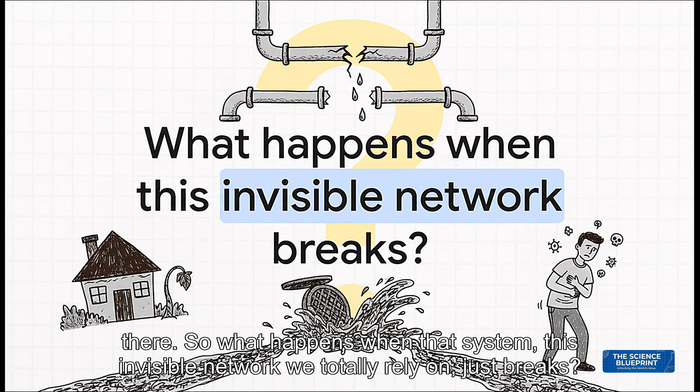So, what happens when that system, this invisible network we totally rely on, just breaks? Well, as we're about to see, the consequences are anything but invisible. In fact, they can be absolutely catastrophic for our health and for the world around us. Yeah, because when these wastewater systems fail, it's not just some simple maintenance issue or a minor headache. We're talking about a genuine and growing crisis that's unfolding silently right beneath our streets.

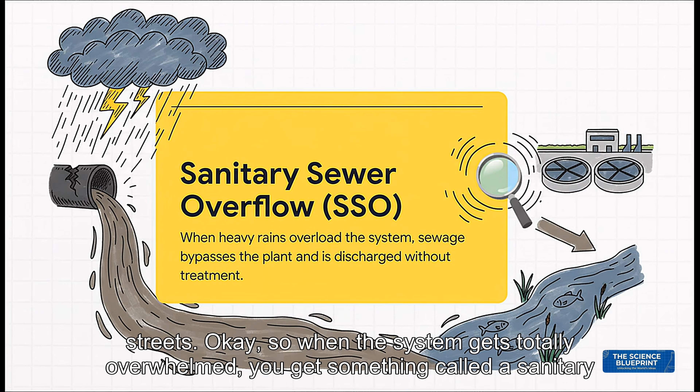Okay, so when the system gets totally overwhelmed, you get something called a sanitary sewer overflow, or an SSO for short. And this is the critical failure point. It means the wastewater isn't going to the treatment plant like it's supposed to. Nope. It's bypassing the whole system and spilling raw, untreated sewage directly into our rivers, our lakes, and even our streets. And the cost of an SSO is just staggering.

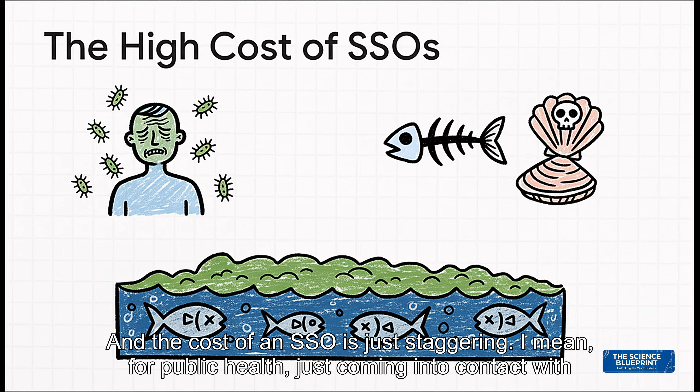I mean, for public health, just coming into contact with this water can cause really nasty infections. It gets into the food chain, which means fish and shellfish from those polluted waters can make people seriously ill. And for the environment, this sudden flood of, well, nutrients, it triggers these massive algal blooms that literally suck all the oxygen out of the water, creating what are called dead zones, where basically nothing can survive.

So, to really get how things can go so wrong, we first have to appreciate the incredible engineering that's designed to make things go right. This isn't just some random collection of pipes. It's a meticulously planned, man-made river system flowing right under our cities. On the most basic level, cities usually have one of two kinds of systems.

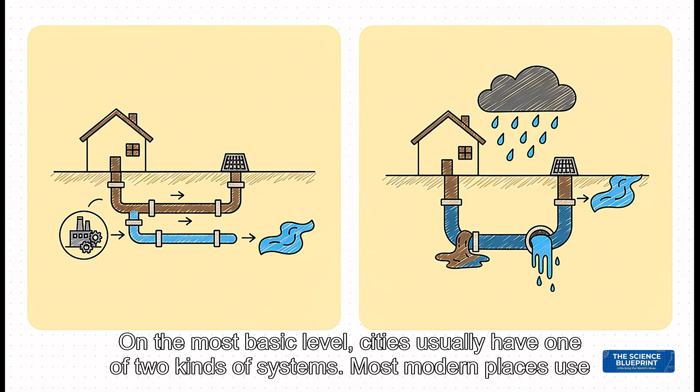Most modern places use separate systems. Think of it like two different sets of highways. One is just for sewage and it goes straight to a treatment plant. The other is just for storm runoff and it goes right into a river or a lake. But a lot of older cities have what are called combined systems, where one single giant pipe carries everything: sewage, rainwater, the whole shebang. Now, you can probably guess which one is more likely to cause a massive backup during a big storm.

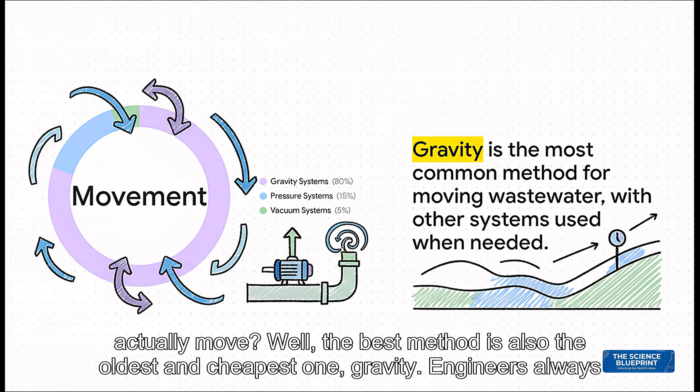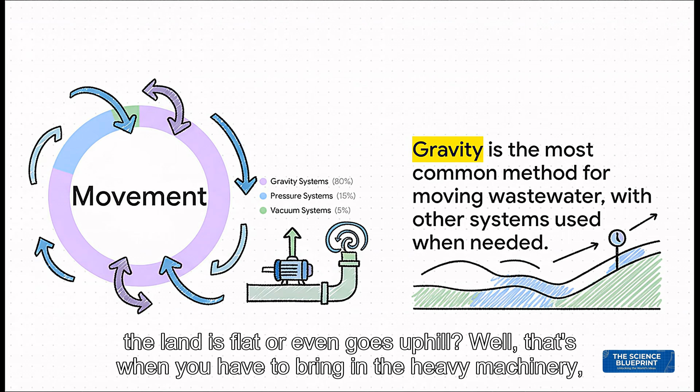And how does all this wastewater actually move? Well, the best method is also the oldest and cheapest one: gravity. Engineers always try to design the system so everything just flows downhill. It's free. But what happens when the land is flat or even goes uphill? Well, that's when you have to bring in the heavy machinery, powerful pressure or vacuum systems that pump the wastewater exactly where it needs to go.

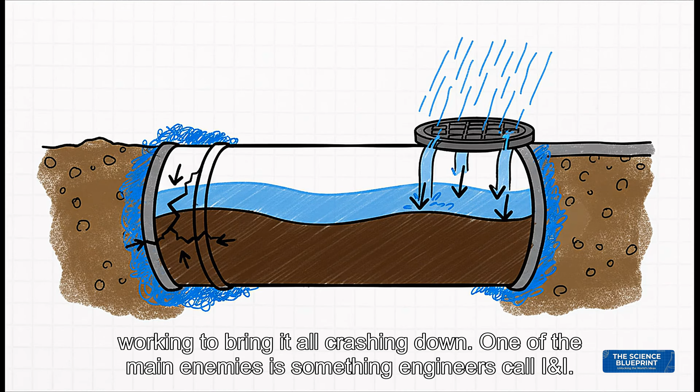So we've got this massive, complex system that's designed to protect us, but it is under constant threat. It faces these silent attackers from both the inside and the out that are pretty much always working to bring it all crashing down. One of the main enemies is something engineers call I&I. That stands for infiltration and inflow.

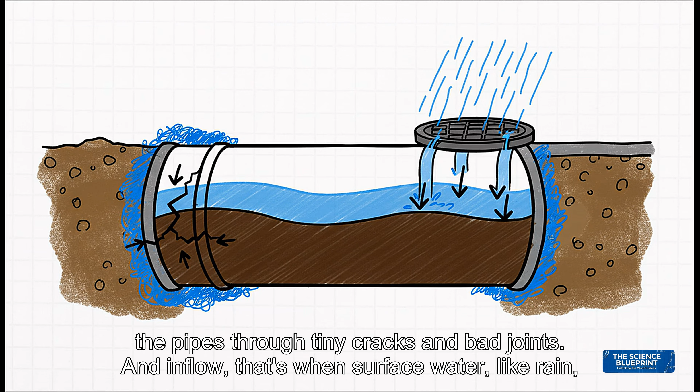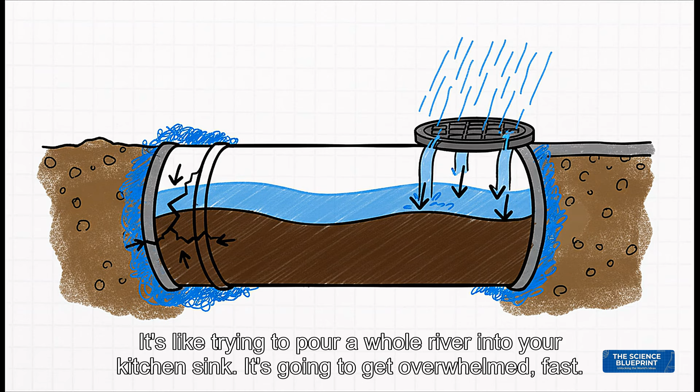So, infiltration, that's when groundwater seeps into the pipes through tiny cracks and bad joints. And inflow, that's when surface water, like rain, pours in from places like a leaky manhole cover. The big problem here is that both of these are dumping massive amounts of clean water into a system that was only built to handle sewage. It's like trying to pour a whole river into your kitchen sink. It's gonna get overwhelmed fast.

But there's another threat, one that's maybe even more sinister. It's a chemical one. It's a process of decay that happens completely out of sight, and it's caused by the very sewage the pipes are trying to carry. It's called hydrogen sulfide corrosion, and believe me, it costs cities billions of dollars around the world to fix. So how does this actually happen? It's a fascinating and destructive 5-step chain reaction.

First, if sewage is moving too slowly, bacteria start to turn sulfates into sulfide. That sulfide then turns into hydrogen sulfide gas, the stuff that has that awful rotten egg smell. Well, that gas rises and collects at the top, or the crown of the pipe. And waiting up there is a different kind of bacteria that eats that gas and turns it into pure sulfuric acid. And what does sulfuric acid do? It literally eats away at the concrete, destroying the pipe from the inside out.

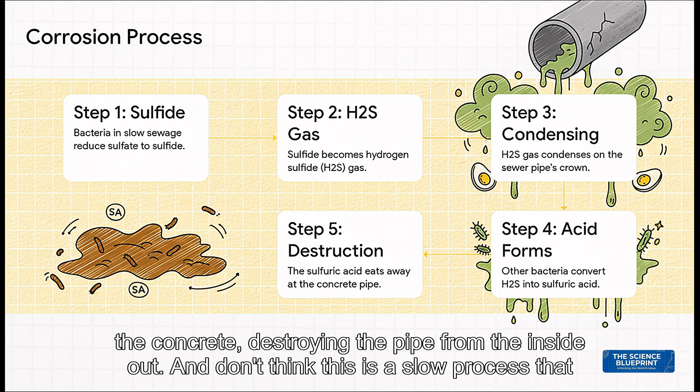And don't think this is a slow process that takes decades. This can happen shockingly fast. Just to give you an idea of the speed here, there was one case study where a brand new concrete structure lost 4 inches of its thickness in just 4 months. 4 inches! At that rate, this corrosion could make an entire foot-thick wall of concrete just disappear.

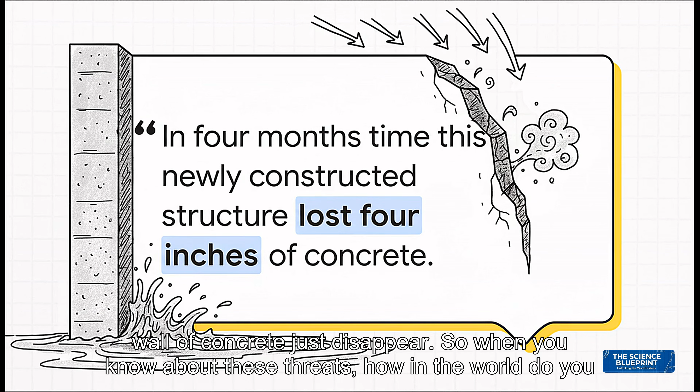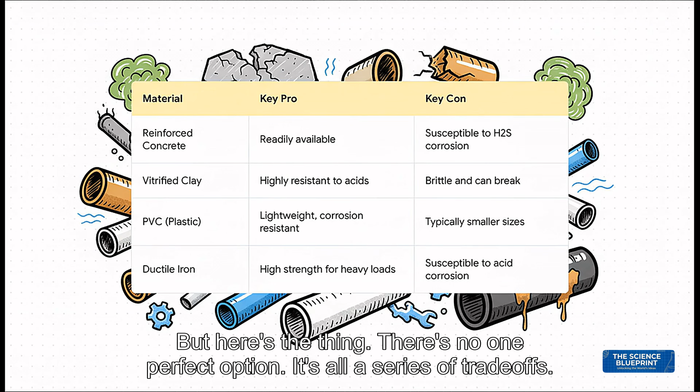So when you know about these threats, how in the world do you fight back? How do you actually engineer a system that's supposed to last for 100 years while it's under constant assault? Well, the first line of defense is picking the right material. But here's the thing, there's no one perfect option. It's all a series of trade-offs.

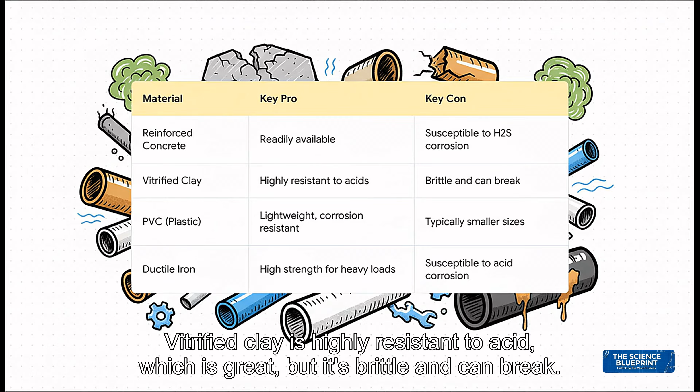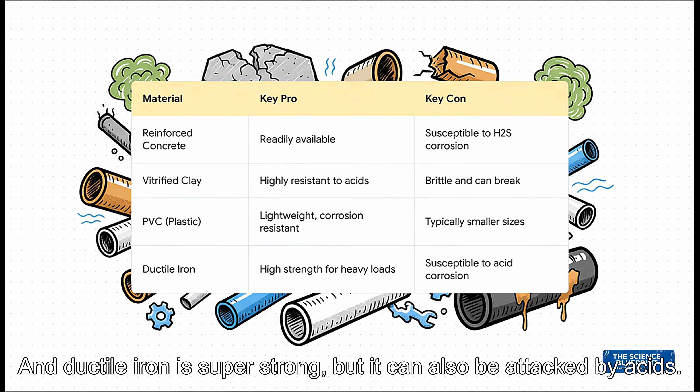Concrete is cheap and it's everywhere, but we just saw how vulnerable it is to acid. Vitrified clay is highly resistant to acid, which is great, but it's brittle and can break. PVC is fantastic against corrosion, but you usually only find it in smaller sizes. And ductile iron is super strong, but it can also be attacked by acids. So the engineers have to choose the right weapon for the job. But choosing the right material is really only half the battle.

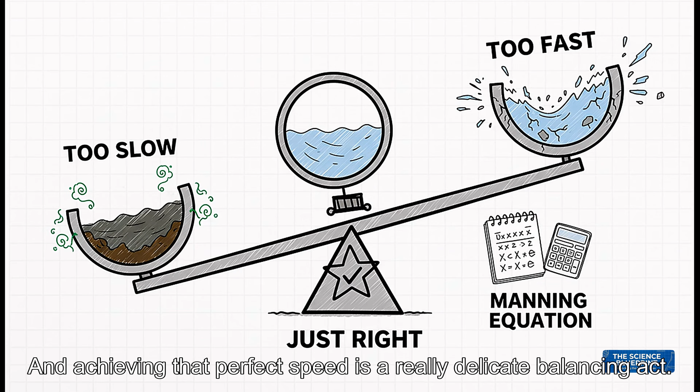And achieving that perfect speed is a really delicate balancing act. Engineers use complex hydraulic formulas, like the famous Manning equation, to calculate the perfect pipe size and the exact slope needed. Because if the flow is too slow, you get corrosion. But if it's too fast, the sheer force of the water can actually start to wear away and damage the pipes. It has to be just right.

So, all of this science and engineering, the specific materials, the complex math, it all serves one single fundamental purpose: to protect our modern way of life. This network might be out of sight, but it should really never be out of mind. It is a true cornerstone of modern society. It's the barrier that separates clean, healthy communities from ones that are plagued by disease. It really is that silent, constant guardian of both our health and our environment.

The engineering is brilliant, and the impact it has on all of our lives is just undeniable. But, as we've seen, these systems are under constant assault, from corrosion, from infiltration, and just from the simple strain of more and more people. So the question we're really left with is, while this amazing system protects us every single day, are we doing enough to protect it? Is it truly built to last?